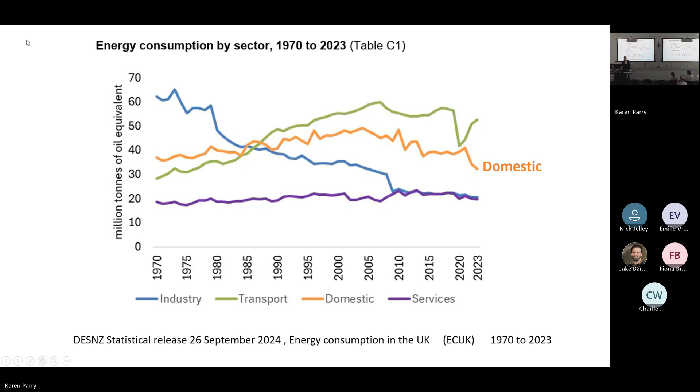Over the next couple of decades, there are 3 technologies that we're really going to have to deploy massively to achieve net zero. We're going to have offshore wind, electric vehicles, and heat pumps, and they just have to be deployed almost everywhere we possibly can if we're to stand any chance of achieving the targets we're looking for. Plus, everything's got to be more efficient. We've got to have PV storage, etc.

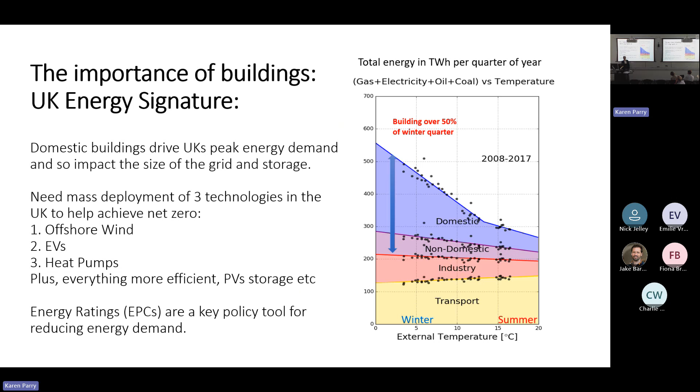So the domestic sector is critical to the future energy system. And I would argue that energy ratings play one of the key roles in terms of a tool for policymakers to reduce energy demand and to potentially make buildings more energy efficient.

So probably half of you in the room and online have got an energy performance certificate. And you've probably paid between £70 and £100 to get one of these whenever you've rented a property or purchased a property. So if I've just paid £500,000 for a house with a SAP of 42 and EPC band of E, what is it telling me? Would you like to hazard a guess? What is your EPC actually telling you? Yes.

Well, if you were thinking it would tell you the energy efficiency and you were a building scientist, at this point klaxons should be going off and lights flashing as it does on QI, when you say the obvious thing. You know, when you're having an energy efficiency rating, surely it's telling you the energy efficiency. If you're an economist, you're probably half right, that actually the EPC is sort of telling you something about the energy efficiency in terms of the services provided at a cost, because the EPC rating is very much based on fuel cost.

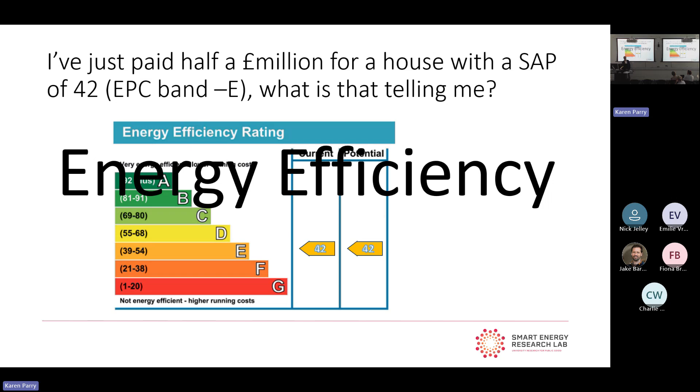And at this point, I can't help but remind everybody about the Hitchhiker's Guide to the Galaxy. And if you're a modeler of any sort, it's a must read. It has to be your core reference. For those of you who haven't read the Hitchhiker's Guide to the Galaxy, Deep Thought is a supercomputer built by a race of hyper-intelligent beings to calculate the answer to the ultimate question of life, the universe, and everything. And after 7.5 million years of computation, Deep Thought finally reveals that the answer is simply 42.

When asked to clarify, Deep Thought explains, I think the problem, to be quite honest with you, is that you never actually know what the question is. And very often that is a problem with the way that EPCs and SAPs are used: people forget what the question is. And the temptation is obviously to try and produce something that answers every question to do with energy use of buildings. And EPCs don't do that.

After Deep Thought, what they did was that, to find out what the question to the ultimate answer is, you need to build an even more powerful computer, which turns out to be the Earth itself. And I think we need to be careful that we don't end up building even more complicated models, thinking that they're going to answer every question just for the sake of it. I think that's a lesson learned.

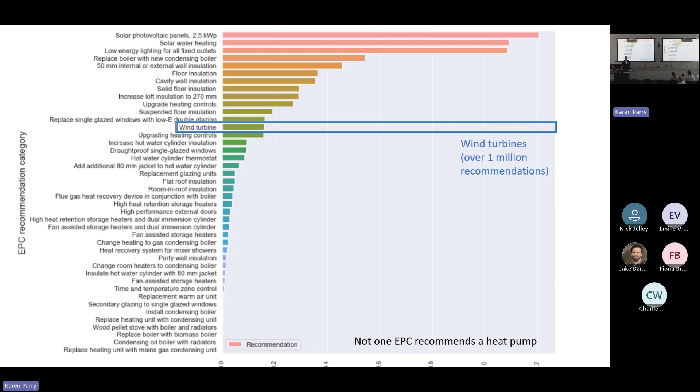And if you look at the ratio of electricity to gas prices over time, the ratio has always been about 3 to 4. And that means that your heat pump has to be 3 to 4 times more efficient than your gas boiler, which in many cases, historically, they haven't been.

And so for that reason, with the way the EPCs model heat pumps, not using time of use tariffs or any sophisticated calculations, which nowadays you ideally would want to do, you end up with the result that heat pumps don't actually get recommended because they're not seen to be cost effective from the SAP calculation.

Now, a lot of people use this result to simply say, well, let's trash EPCs, let's get rid of them, or let's make the metric different. Let's not use a price metric, but use a kilowatt hours metric, or some other metric, CO2 or something. I think we have to be careful about that.

And I'll explain a little bit more about this, but the reason why we need to be careful about that is that is one solution: we can come up with a different metric that makes heat pumps attractive. But that will still probably mean they're not very cost effective, and so many people will not be encouraged to use them. Surely a better thing to do would be to change the relative price of gas to electricity. And then that problem would disappear.

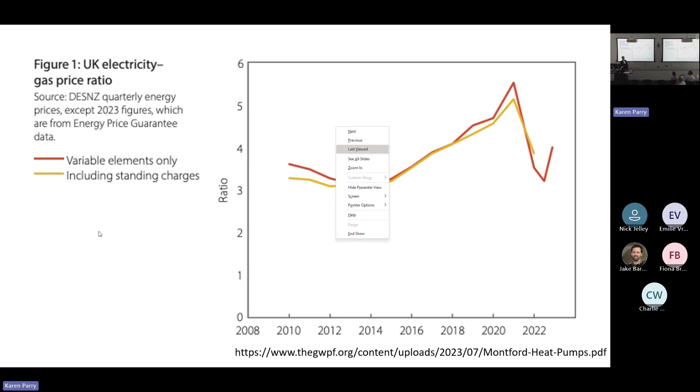And there is no fundamental reason nowadays why the price of electricity has to be tied to the price of gas. It's a historic pricing mechanism, a market mechanism that we've used, which really is no longer applicable to the current day situation.

So just to lay a bit more of the background on the history of ratings, you're probably very well aware that almost everything has an energy rating these days: cars, homes, fridges, light bulbs, appliances. Building energy rating has particular challenges, I would argue. Buildings are not normally mass produced to a high standard.

And cars tend to get used for one purpose, which is moving from A to B, whereas obviously buildings get used in many, many different ways. So models are generally used for testing, for producing energy ratings, as opposed to physical testing, which is often used in other rating schemes.

One of the challenges with almost all rating schemes, and comparing it to any real monitored data, is that you're rating the technology, not the technology with the normal occupant behaviour variation. So an energy rating will never predict what your house or your car will use in terms of energy. It's assuming a standard behaviour and occupancy. You would hope that that standard behaviour and occupancy is similar to the average, otherwise it wouldn't really be telling you much. And that's what we're going to be looking at later on.

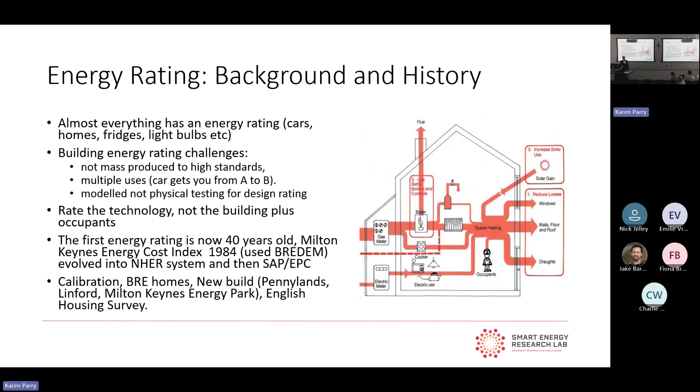We've had various attempts at calibration using field data, but the field data has been relatively small sample sizes, very often less than 100 homes, and largely in new homes historically, or through things like the English Housing Survey, where there's been very little energy monitored data to do the comparison with.

It's interesting to go back to some of the original papers on the Milton Keynes Energy Cost Index, and what's really clear is that there was a very clear set of aims and objectives for the original energy rating schemes. It was to inform owners when comparing one house against another, and also to act as a regulatory method. As I said, the metric wasn't energy, but energy cost as the key performance metric, as it's what homeowners were interested in, and that's why it was chosen.

And there were some interesting philosophies behind the original development of it. The original development was to only model significant factors. No point in knowing something very, very accurately if it didn't really have a big impact on the energy performance, if you didn't know other things accurately. And so something like the ventilation rate, we still don't know very accurately in a home, and yet it can have a very big impact.

And its philosophy was really to reduce data input because of this relationship between accuracy versus complexity. As you increase the model complexity and the number of data items that you need, the modeling error reduces. The model gets better because you have more information. But as you have to collect more information, you can potentially collect data errors. And the combination of those suggests that there's a sweet spot somewhere. And that sweet spot will change depending on the complexity of the model, but also as the ability to collect more accurate data is developed.

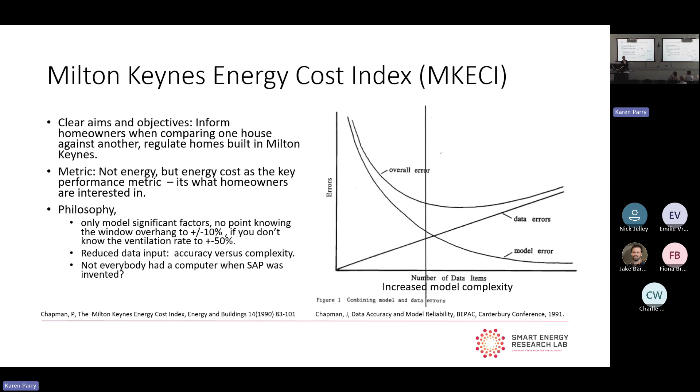But I would argue that now, as computers have got so easy to use, and so easy to model anything, and in fact, ChatGPT, you can put it on to do anything if you are that way inclined, the complexity gets much, much larger. But there is still this issue of error in data entry, error in collecting the accurate data, and the cost associated with that.

So four decades on after the energy rating, the systems have evolved from the Milton Keynes Energy Cost Index to SAP 10. We now have the main program for assessing energy performance certificates. We now have 26 million energy performance certificates in England and Wales, 50% of homes. It's cost us over £1 billion to collect that data. So the data itself has a phenomenal potential value, and we shouldn't forget that, regardless of what model it goes into.

As I said, the energy cost index is now labelled as an energy efficiency rating, which is confusing for most people who think that EPCs are mostly about efficiency.

And in fact, you can only really get an A and a B home if it has photovoltaics, and you can really only get an F and a G home if it's not gas heated. It's nothing to do with the efficiency of the fabric and the heating system. It's to do with the costs and the fact that obviously electricity is much more expensive than gas, and that's why most F and G homes are electrically heated. And you also, in order to get an A and B, need to have some generation of electricity to offset the standing charges.

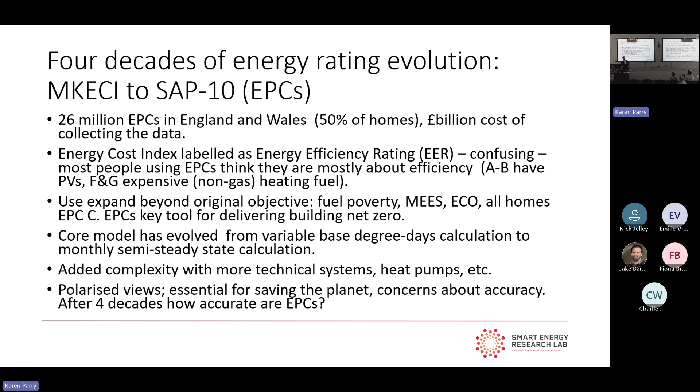Given that it's taken 4 decades to get here, what I'm now going to focus on is, now that we've had 4 decades, how accurate are the EPCs? And to help us understand how accurate they are, we have used data from the SERL Observatory. The SERL Observatory is 13,000 homes that are roughly representative of the Great British household population, where we have half-hourly electricity and gas data, tariff data, data about location, data about the local weather at an hourly resolution, and for half the homes an energy performance certificate. So this data set allows us to compare the actual metered data with what the energy performance certificates predict.

And we also have quite a bit of other contextual data about the homes, the occupants, and what they do. And in particular, whether the occupants behave in the same way as the standard normative calculations that many models attempt with assumed occupant behaviours. I'll talk about that later.

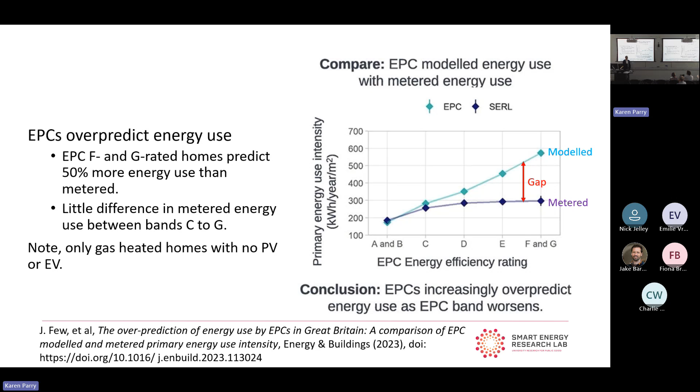And you said earlier that there weren't any gas-heated homes that were F and G. Yeah, I said most homes. But is it a reliable sample out there? It's a much smaller sample as you get away from C's and D's. You're absolutely right. The sample sizes are much smaller. And the paper that's referenced here has all the detailed information. But you're right, it is an issue. We have done a separate study looking at electrically heated homes, and the results are, if anything, slightly worse with electrically heated homes in terms of some of the gaps.

So one question we could pose is, who's responsible for this gap? Is it building physicists who developed the wrong core model? Is it the government who set the method for implementing EPC metrics and all the defaults that go into any model? There are loads of defaults that have to be used regardless of which model you're using.

Is it the EPC assessor who always gets the brunt of many of the accusations of making errors? Is it the energy efficiency installers who just don't install the technology properly and therefore we don't get benefit from it? Here too, in some cases. Is it the occupants who don't use the building as specified or took the benefits as comfort? Or is it the scientists and analysts who do not do the energy measurements correctly?

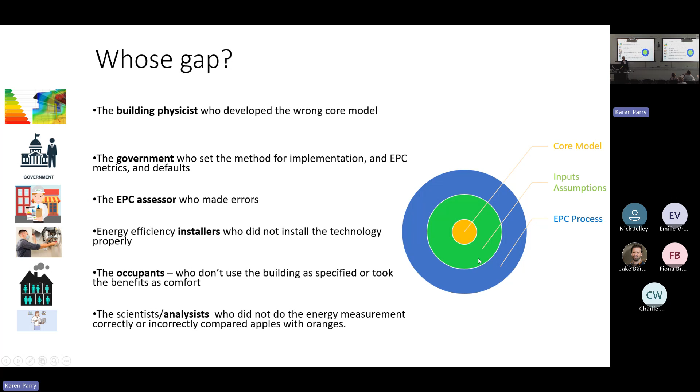We sometimes always blame the models, and assume that the meter data is always 100% accurate. There's no error in that term. So I think we always have to be careful in terms of that. And really, it's this whole ecosystem of the core model, the input assumptions, and the EPC process that can result in the gap. I would argue all of them are probably responsible.

Some of which is based on square meters. It's based on some square meters, yeah. I mean, the difficulty is some of that's based on the number of people who should live in that size house. Yes, that's right. So there's an assumption about occupancy, which I'll come to in a minute.

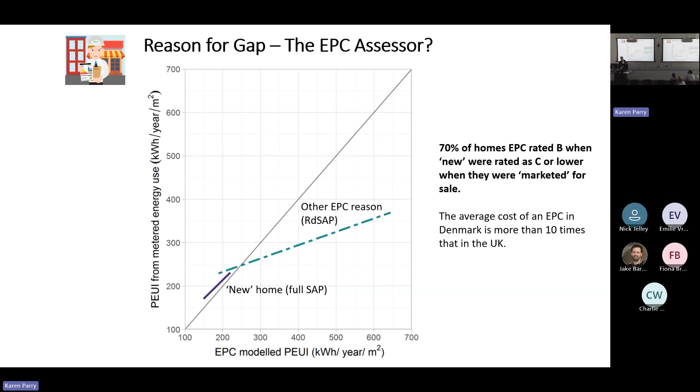and should have a much more rigorous process in terms of validation than an assessor trying to basically rely on what were the typical values for a home when it was constructed at that age, which is what happens with a reduced data SAP. It uses a lot of defaults of the age of the property. So obviously you get what you pay for.

It used to be the case, and I don't know whether it still is, but in the very early days in Denmark, they would take a drill out and drill through your floorboards to find out if you had insulation. And they would drill through the walls to find out if you had insulation. For some reason or other, this just seems to be completely unacceptable in the UK, that we would contemplate doing that to collect reliable data about the energy performance of our homes.

And are they all required to use the same assumptions in their modeling for EPC? No, each country has its own. They all have to report an EPC at point of sale or rent, and it has to include a report of primary energy use intensity, which is what I have plotted on the vertical axis. But interestingly, there are similar results to the results I presented here in systems in other countries. So that price includes somebody physically visiting the property. Yes.

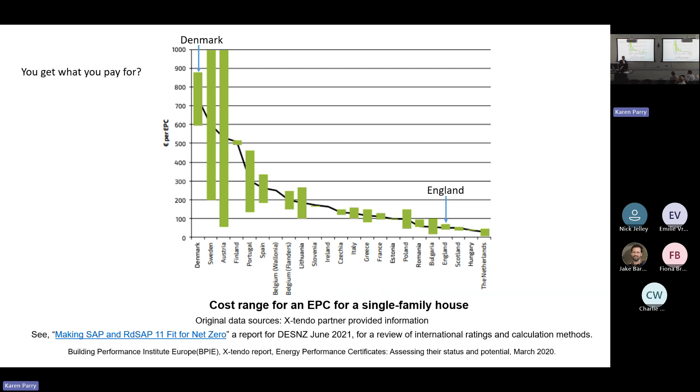Well, yes, absolutely. As I say, you get what you pay for. If you're thinking in the longer term, what's the average price of a home? £300,000. And if you can't sell your house because it isn't a C-rated house, and you're only paying 60 quid for this, given the value that is attributed to an EPC, the cost of collecting one seems to be disproportionate to it. And there are, I believe, lots of things that could be done to improve that.

So coming on to the important point of occupancy and the fact that SAP makes standard assumptions about occupancy. Occupancy does make a difference to the energy consumption. And because we ask all of our SERL participants questions like how many occupants are there, what do they set their thermostat at, we can look to see whether their energy consumption differs as a result of that. And this is what we find: yes, the more occupants you have, the more measured energy there is in the building. And also the higher the thermostat temperature, the more energy consumption there is.

But what is slightly worrying is that the gradient is always still the same. It's not on the one-to-one line. It's a much, much flatter gradient. You're comparing somebody who says there's only one occupant in my house with what the EPC assumes based on the square meters?

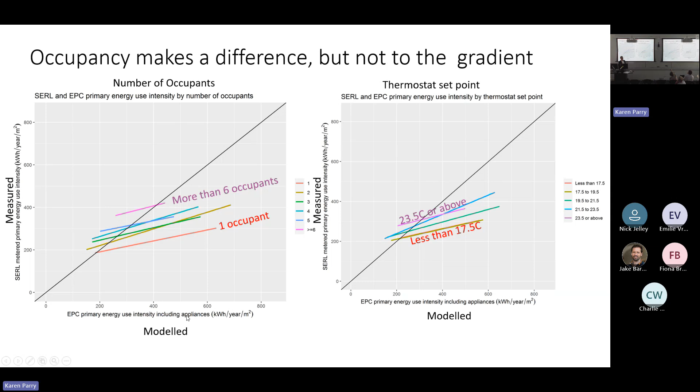No, what you can then do is what I think you're looking for, which is to only look at the houses that behave like SAP assumes. So only the houses that have the number of occupants that SAP assumes and the thermostat set point temperature. And they say that they heat their whole house and they keep their living room comfortably warm and they're not struggling financially. So those are the people marked here as yes, occupants behave like SAP. And these are the ones that don't behave like SAP assumes.

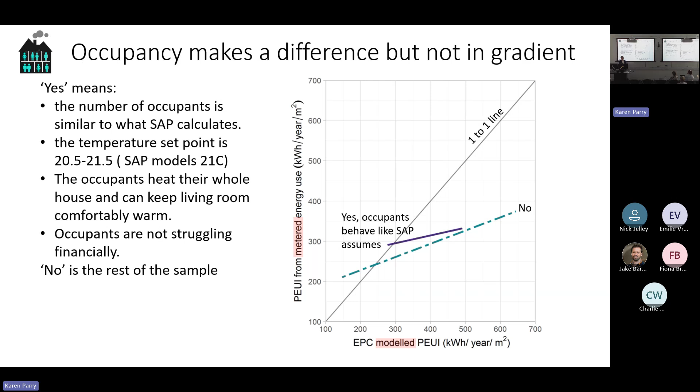And what we had hoped for when we did this analysis was that the yes group would go spot on the one-to-one line when we took all of that into account. So occupancy makes a difference, but it doesn't appear to make a difference to the gradient. The gradient in some ways is a real problem because what you're ultimately comparing is one house and one band against another, and not getting the reduction in energy consumption. Why is that?

So based on all of that analysis, we came up with some narratives, which we did in 2020. Homes are not achieving SAP levels of comfort was one of the things that we said, but that doesn't fully explain the gap, because people have been aware of this gap, and almost always the explanation is that poorly insulated homes just aren't heated to the level that they should be or that SAP assumes. But this suggested that doesn't fully explain this gap.

We also hypothesized that homes improved since they were rated. Many of these ratings can be up to 10 years old, and we're metering many years after that. And so there could be improvements to those homes, more low energy lights, better technology that goes in, a whole host of things that could happen to those houses that the old EPC wasn't correctly capturing.

We're very aware that there's less electrical power consumption for lights and appliances than SAP predicts, just because technologies have improved so much, which impacts particularly on the primary energy analysis and incidental heat gains in the calculation. So that could be improved. Also, we know that the SAP algorithms make some heroic assumptions about what the internal temperature is and how that changes, and that could be improved.

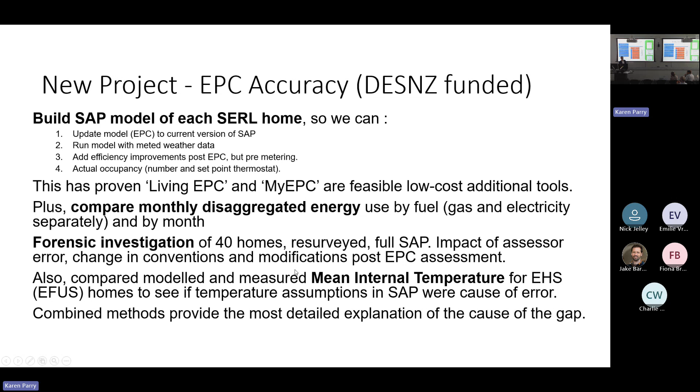Are you saying you were able to come up with an EPC which matched consumption? Well, no, that wasn't what we tried to do. Let me just show you the next graphs, and then I'll answer that question, hopefully. So by the time we'd filtered everything out that could cause any noise, we ended up with 700 homes where we had the monthly gas and electricity consumption.

We then took a whole host of different data sets that we had got hold of, data sets about how the building was constructed, all the data that an EPC assessor collects, data about the vintage of the EPC, the actual weather, the efficiency improvements that had happened to the house that were lodged in the NEED database, and behaviour data that was self-reported, and fed that into our models.

And so we could do a base model where none of these other things were corrected for, but then we could correct for just having the most recent version of RdSAP, so no historic versions of the SAP calculation. We could update it with the real weather. We could update it with upgrades to the house that we were aware of, and we could update it with the real occupancy.

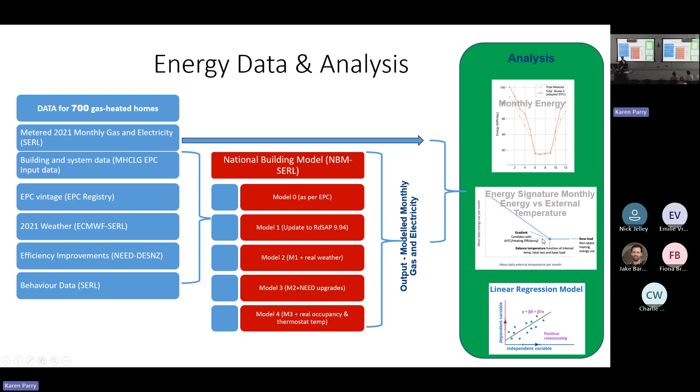And we could look at the data on a monthly basis and also on an energy signature basis, and also do a linear regression. I'm not going to go through all of the details on this, but I want to spend a bit of time talking about the energy signature method, which is again plotting the energy consumption. SAP only predicts the monthly energy consumption. We can look at the monthly energy consumption and how it varies with external temperature in theory

and using metered data. And this shows you some daily metered data showing you that you get this energy signature where you get this flat bit in the summer and this gradient in the winter time. And the gradient tells you something about the heat loss divided by the heating system efficiency. So a very steep gradient is a very inefficient home. A very shallow gradient is a very efficient home in terms of heat loss and heating system efficiency.

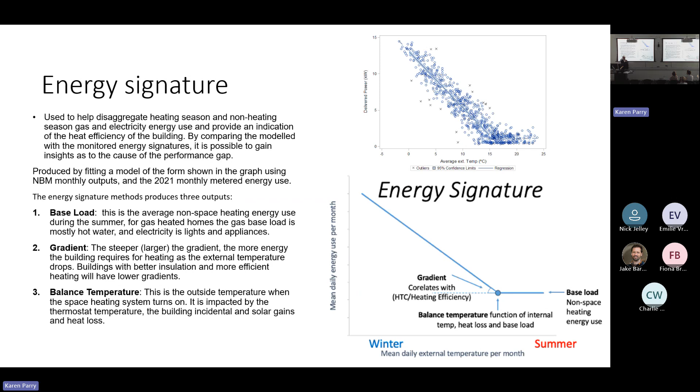The base load tells you the non-space heating energy use. And because we have that broken down in gas heated homes for gas and electricity, we can separate out the algorithms for lights and appliances as opposed to hot water and space heat and gas cooking. And the inflection point is the balance temperature, the temperature at which the heating system comes on. It's not the set point temperature as defined before.

And in some ways, it's bizarre that we haven't really got to the bottom of this before, because this is data that's 2 decades old that shows modelled heat loss from a SAP calculation against the measured heat loss of a building. And you get this sort of crossover point where in the middle, the average heat loss is roughly right, but there's a lot of scatter. But as you go to poorly insulated homes, they're actually performing better than SAP assumes, and well-insulated homes are performing worse.

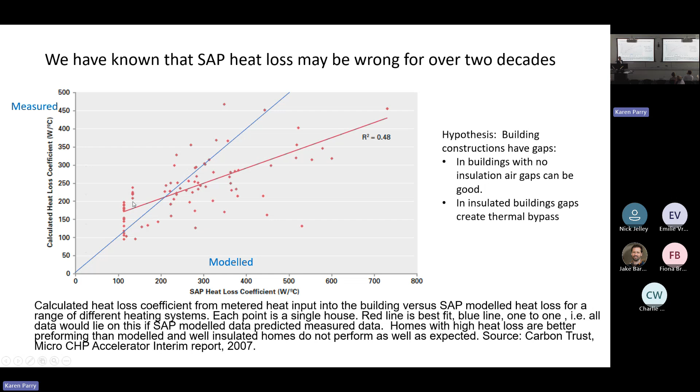You could hypothesize a reason for that, and the reason that I would hypothesize is that in buildings with no insulation at all, air gaps are good because air gaps actually provide a bit of insulation. And it's very difficult to build buildings without air gaps and trapped air pockets in them. Whereas if you've got an insulated fabric, air gaps are bad because they can allow thermal bypass, they can allow circulation around, because the air isn't as good an insulator as the insulation itself. And so you could hypothesize an explanation for this type of graph.

So just some concluding personal reflections. The good news is that the Great British housing stock is better than we think from EPCs. There are a lot of homes that we think are Ds, Es, Fs, Gs that are probably 1 band or more better because they've been improved since their original EPC.

And the less efficient older properties are generally even better than the average, in part because they've had more upgrades since they were rated. So houses that started off being very inefficient are more likely to have had more efficiency improvements than those homes that are already efficient, which aren't going to have that many efficiency improvements.

Occupants can make a big difference to energy use, but are not the only explanation for a gap. And modelers and analysts get things wrong all the time. And occupant behavior is normally the soft target for these unexplained results. I could give you a very good example of a paper saying that energy efficiency improvements all disappear after 4 years. It was from Cambridge, and it was a very good example of analysts getting things wrong and blaming the occupant for it by saying the occupants had rebounded massively and all the efficiency improvements had gone on extensions and everything else. But we do this all the time.

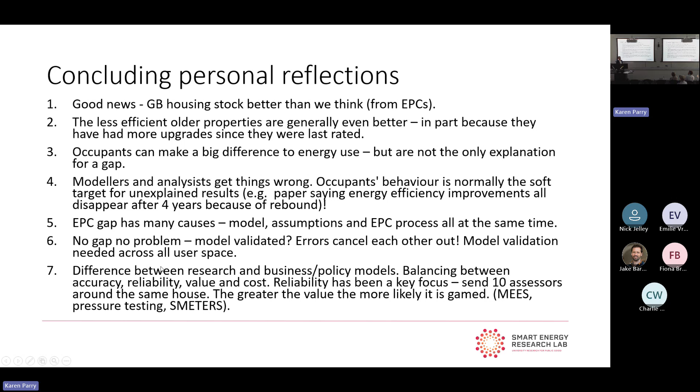The other thing that you have to be aware of with a business or policy model is that it will be gamed. And there are lots of examples of the gaming that goes on in these sorts of models, and even gaming of physical measurements to replace predictions.

The key metric that you might want to use to energy rate a house obviously can change over time. What is the role of energy efficiency in a decarbonised world? What is it we're wanting to be able to compare in that type of scenario where everything's decarbonised? You wouldn't want to have a CO2 rating in that. Are you trying to minimise the peak demands on the electricity system? And I think we have to be realistic that no model is good at everything. And trying to design a model that is good at everything can end up being a hostage to fortune, that it's not really good at anything.

I would argue that validation is not just for Christmas. Technologies and practices and climate are all changing. And therefore, you would expect the way in which models model things and predict things to change as a result, with different assumptions and different ways of handling the modeling. Obviously, the two most recent things are COVID, where we've changed the way we might use our homes, we might work from our homes much more, and the cost of living crisis, which has radically reduced energy consumption in many homes, particularly in poorer homes. The more complex a model, the more assumptions you need to validate, which is something that I think is sometimes overlooked.

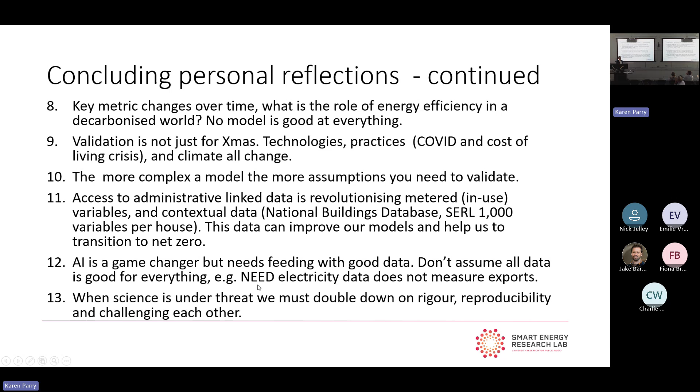I just wanted to finish off with where I basically started, which is that we probably haven't been critical of ourselves enough in this field, given that it's taken us 4 decades to get to where we are in terms of trying to explain some of these problems. Obviously, science is under threat in many ways, and if we don't double down on rigor and reproducibility and challenge each other on things like this, then I think there will be more openings for people to trash the science behind a lot of what we're trying to promote.

And these are just some, to repeat the acknowledgements and to provide some references. Thank you very much.

At a big level, Taj, I was thinking the other day that the EPCs are predicting that we're more efficient than I believe we are. The way in which they're saying so many are Ds, quite a lot of Cs, I forget where we've got to in the distribution, which is the opposite of what you're saying. I just don't believe we've done that level of energy efficiency improvements that the EPCs appear to be showing. But you are saying we've done better. Yes. I thought we had good news, Brenda.

I think we have done better. And so what we found is a large proportion of that gap is due to historic EPCs not reflecting the changes that have happened to buildings. If you put a new boiler in a house, if you put new glazing, both of which are regulated changes, you have no choice. You don't opt for that. If you go to a gas boiler installer, they have to install a more efficient boiler than probably the one that you've got if it's more than two years old or so. So you have no choice. You don't know when you're improving the efficiency of your building, but you will do.